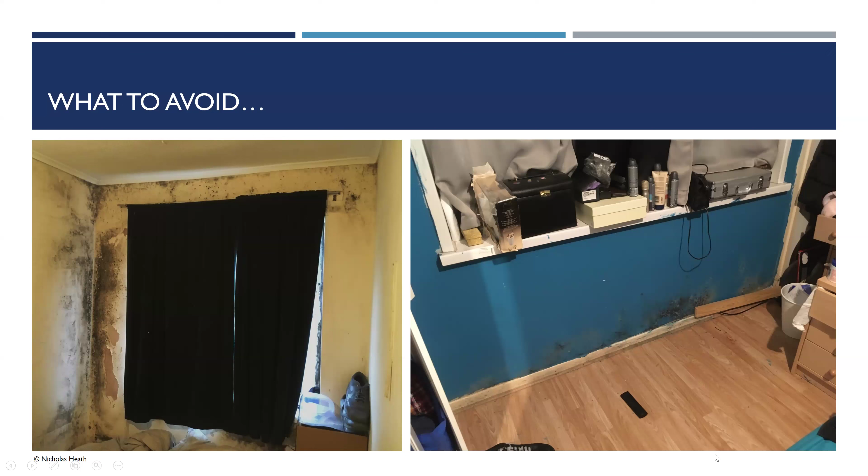This sort of thing we're also trying to avoid. This wall you're looking at here has not been retrofitted, but it's going to be. These sort of embedded timbers are one of the key risk areas. That's the sort of thing that can happen behind your insulation if you don't do it properly.

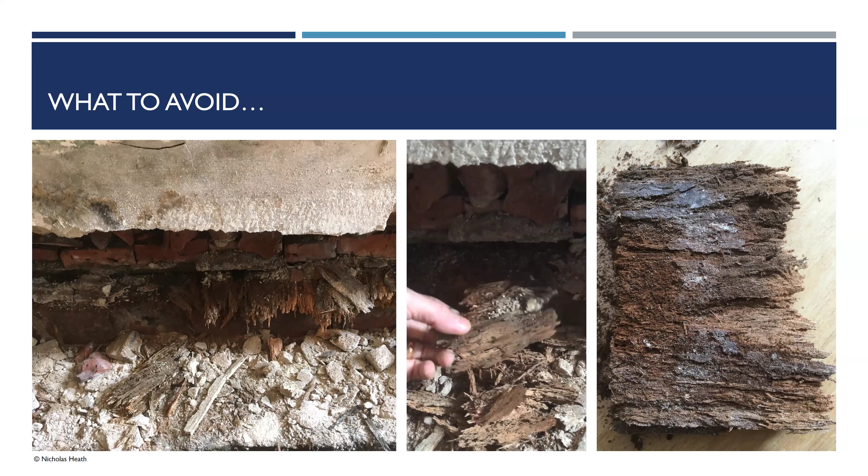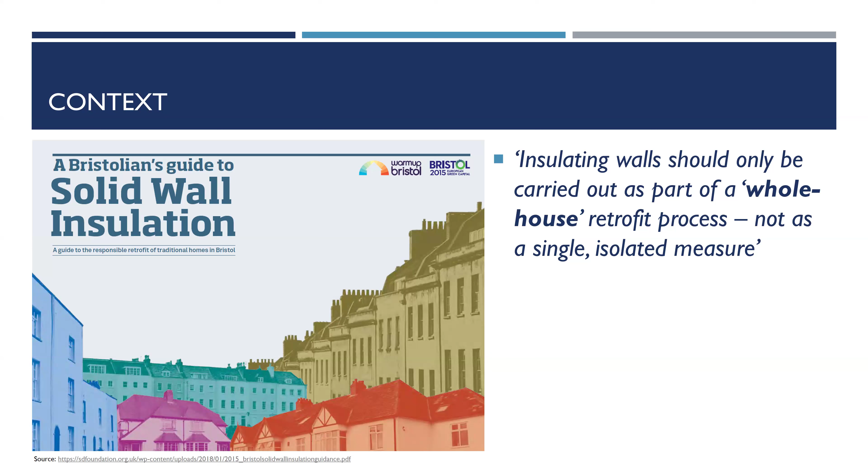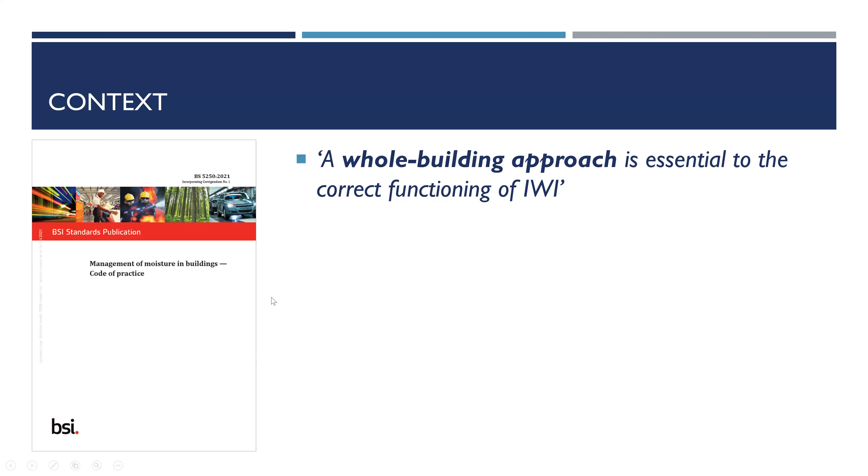This is very important as well. Solid wall insulation, internal in particular, is not a just-do-that measure. It's part of a whole house process. This is a buzzword, a buzz phrase you'll have heard a lot in recent years. It's also quoted in this British Standard document, which is really significant. If you work in this area, you should have a copy of it, I would definitely say.

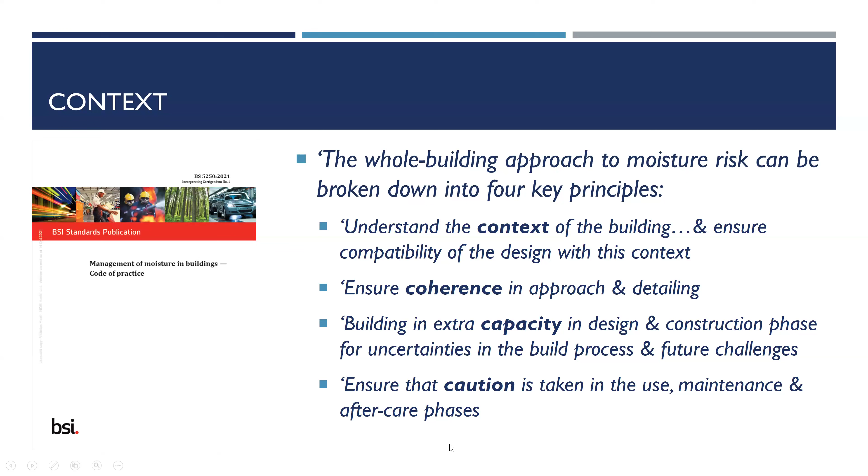And there are 4 really useful principles they use to describe the whole building approach. So if you remember these words about understanding context, ensuring coherence in detailing, building some capacity and caution, then again you're halfway there. There are an awful lot of contextual elements to think about.

I don't need to talk through all these, but you need to understand what else needs doing to the building, where are the defects, what's your air tightness and ventilation, heating strategies, are there any heritage concerns, any targets you're trying to meet, what sort of modelling are you doing and how good is it? How robust is building control guidance, and what's your building control officer like? How understanding are they of the need to address traditional building fabric properly?

Have you got a decent survey? Are you addressing all the technical details? Are you using the right materials? Are you addressing moisture properly?

This is where nearly all the technical risk is, and it's where a lot of my work sits at the moment. Overheating is a particular risk with internal insulation, depending on how it's done, and particularly the way the climate's going.

What else needs doing to enable the internal insulation? What are your occupancy levels like? Where's the budget? How are you going to make sure that the building, as retrofitted, is good not just today and tomorrow, but in 50 years' time? We're going to get more pressure on buildings for all sorts of reasons, so it's a long-term view.

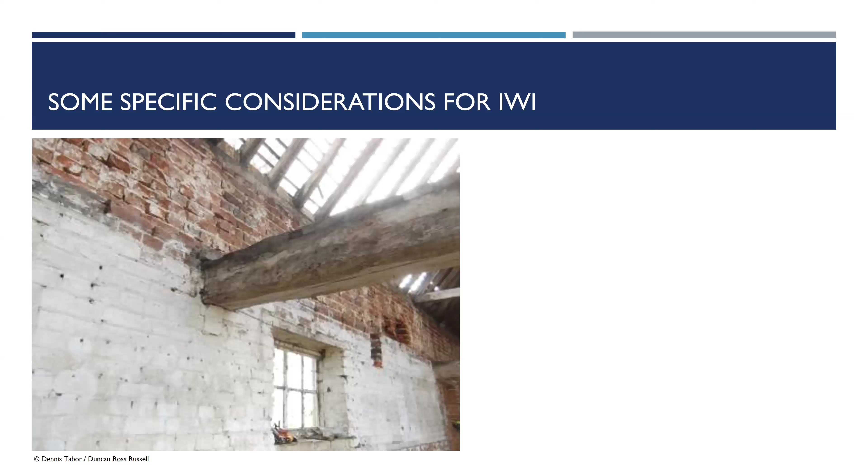Specifically for internal insulation, there are a small number of particular areas of concern that can affect risk profiles. We're talking about building condition, both now and in the future when the building's retrofitted. We're talking about how you're going to manage internal water vapor and external rainwater. Is the masonry exposed, or is it rendered? Is it lime render or cement render? Is the render knackered? Have you got holes in your pointing?

You're going to make your walls colder, potentially making it harder for them to dry out, so how are you going to manage that? What are you doing about embedded timber and metal elements? Can you address thermal bridges? What's your air tightness strategy? And are you mitigating against overheating risks?

Risks are very project specific. They really depend on where you are, what direction you're facing, what materials you're using, whether the building's in good nick, what type of insulation and how much you're using, how well it's designed and installed, and so on and so on.

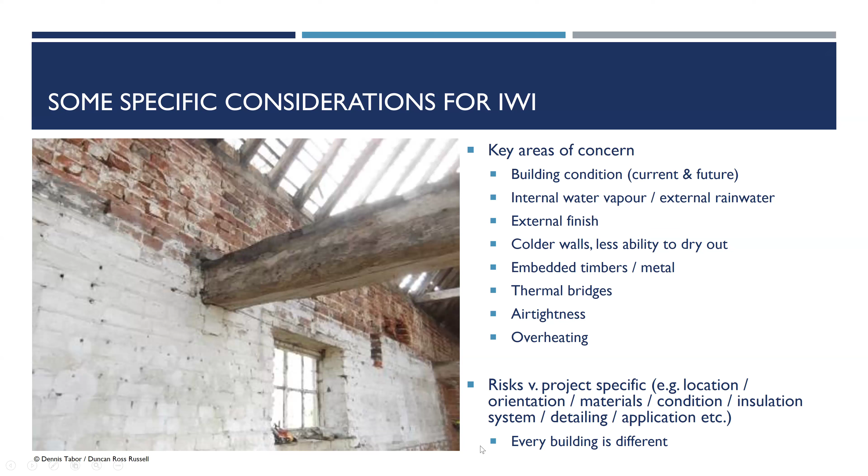Every building is different, so what you've done on one building might not work on a neighbouring building. This is a project I worked on a while ago, which has 5 different wall types. It's a Grade 2 listed building near Cambridge. It's not been retrofitted, but I wrote a retrofit strategy and did some moisture modelling for them, and they need at least 3 or 4 different internal insulation strategies because of the different wall types.

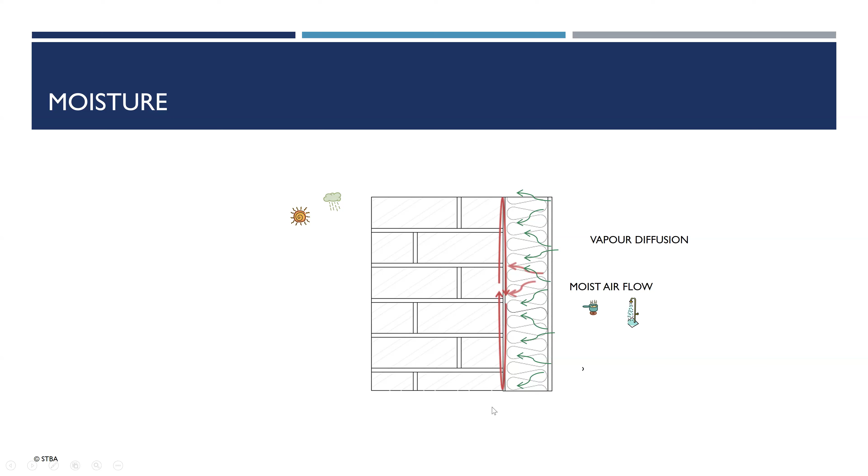You can have liquid water entering the wall by capillary action from the ground and from the walls. You can have gravity and liquid diffusion through open joints, and then there's this not very user-friendly term, solar-driven vapor diffusion, or sometimes called reverse condensation, describing a phenomenon in typical spring weather where you get driving rain on a masonry wall and then the sun comes out. Some of that absorbed water will evaporate to the outside, but depending on context, some can be driven further into the wall, and on occasion it can go all the way through to the insulation. If you have an impermeable insulation layer on the inside, that water has nowhere to go, and that's potentially bad news. So you need a moisture risk assessment that looks at all of this.

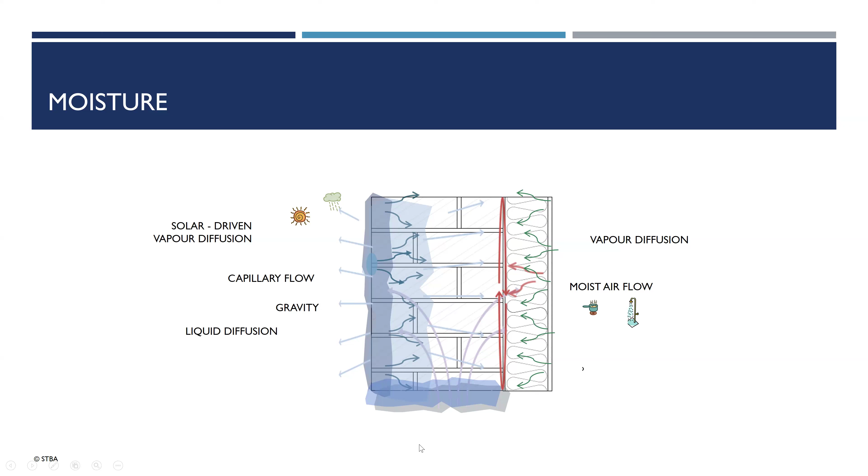Until quite recently, we've tended to use a very simplified moisture risk assessment that only looks at internal vapor and ignores all of this, and it's not appropriate for masonry walls in any way, which is why some of you will have heard of things like WUFI, which provide a much more detailed assessment. I'll show you an example in a few minutes.

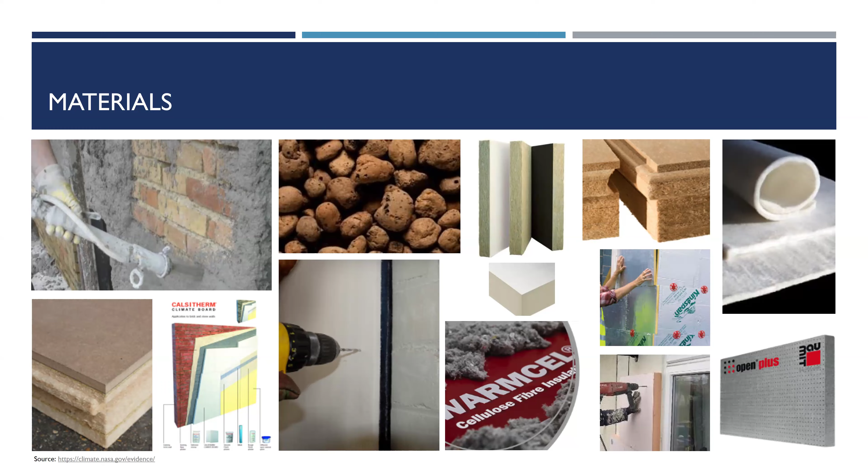That also explains the move towards more natural, generally but not always, moisture-open materials that can allow moisture to diffuse through them in various ways. A lot of rigid systems and a lot of wet systems are emerging and becoming more popular.

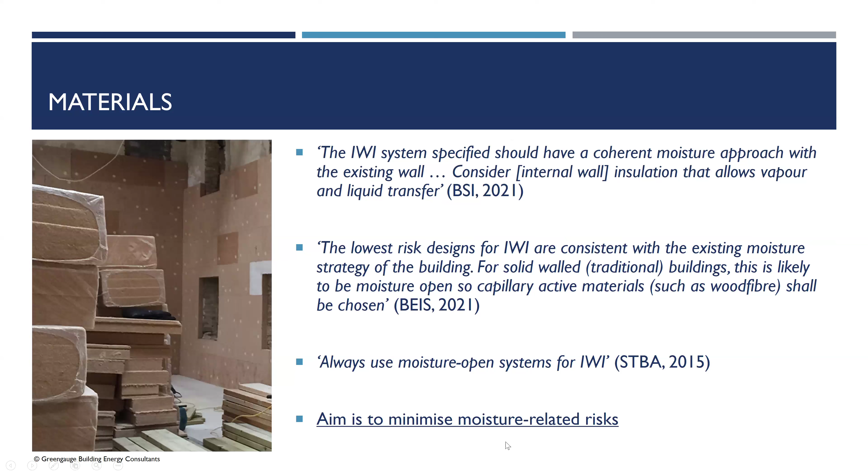These are various quotes from good practice guidance. They're just different ways of saying that if you've got a traditional masonry wall, you should be using moisture-open insulation, and all good practice guidance for traditional buildings will advocate this. What you're trying to do is minimize your technical risk.

So a lot of systems will use board-based materials like wood fiber here, which is probably the most commonly used. But there's much more interest and use of things like insulating lime plaster. That's a building in the North York Moors, and this is a barn conversion in the Dales, both of which I've worked on.

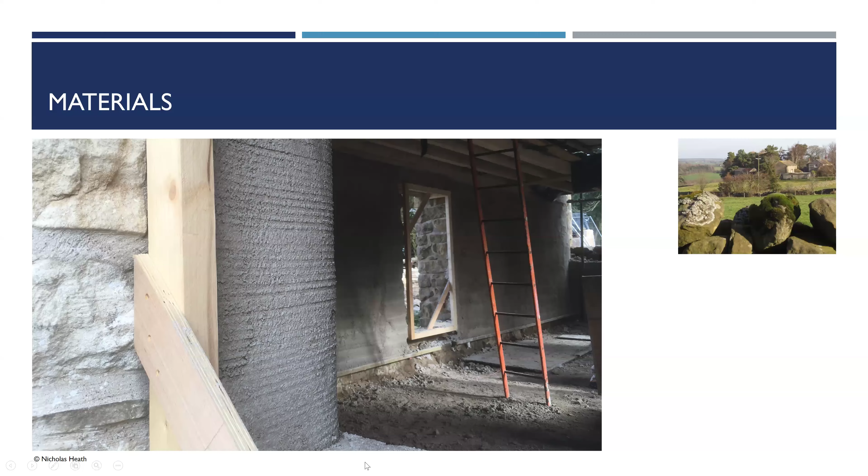This is really good in a lot of ways, but it's not a silver bullet. There is no silver bullet for internal insulation, but I see it being used a lot more for various reasons which I don't have time to go into now. As a baseline, it's important to understand that you're not just thinking about thermal performance with materials. They have an awful lot of roles to fulfill, not least technical risk management and looking after the building fabric and the occupants inside.

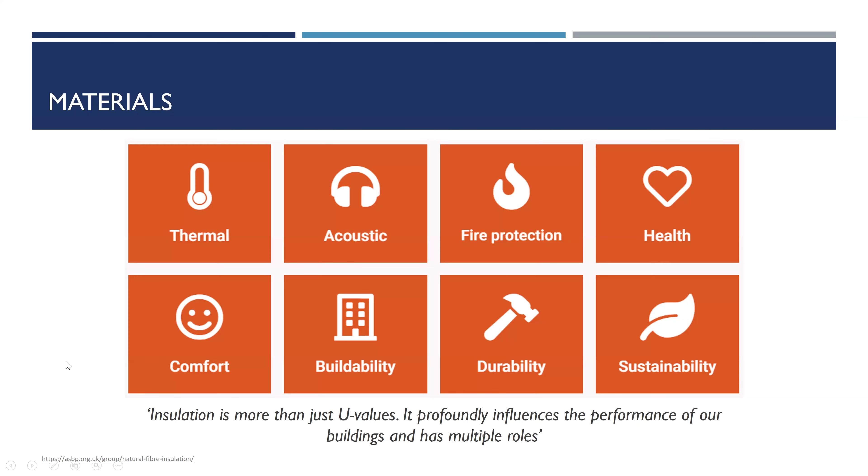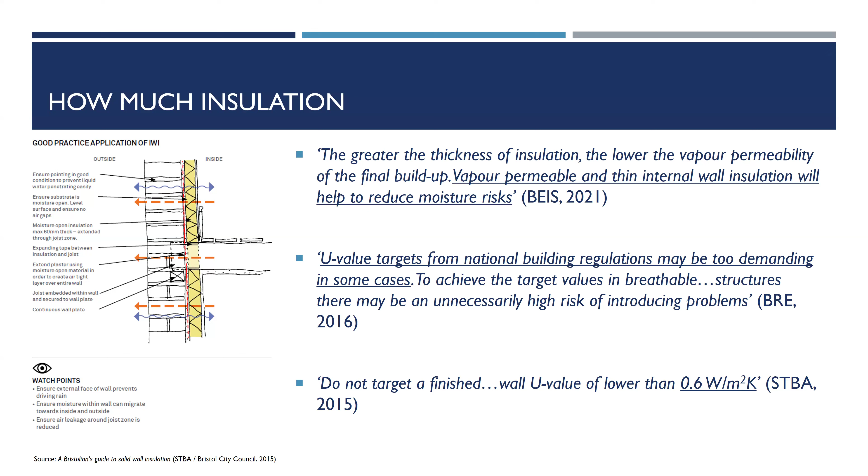When you've thought about materials, you need to think about how much to put on. Again, there are lots of quotes here generally suggesting there's more research and guidance highlighting the fact that doing a bit, but doing it properly and paying attention to the details, is probably going to be more effective and lower technical risk than trying to get the lowest possible U value.

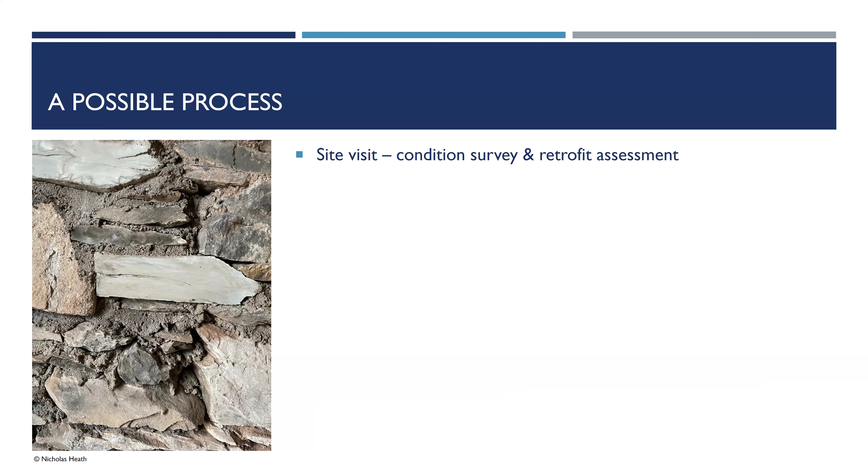So what else? There's loads more I could talk through, but I don't have time, so I wrote a very, very quick possible process. This is the sort of approach that I tend to take on the projects I work on. You look at the building, get a good understanding of it and of its condition. You come up with an initial retrofit strategy, maybe informed by a bit of energy modelling. You have some shortlisted wall insulation options, generally looking at external insulation in the first instance because there's lower technical risk. You can't often do it, so you then look at internal insulation.

Carry out a decent moisture risk assessment, especially in more exposed areas. I've done a lot of risk assessments in exposed and benign areas and found risks vary depending on much more than just where you are in the country. That should lead you towards a more appropriate insulation strategy.

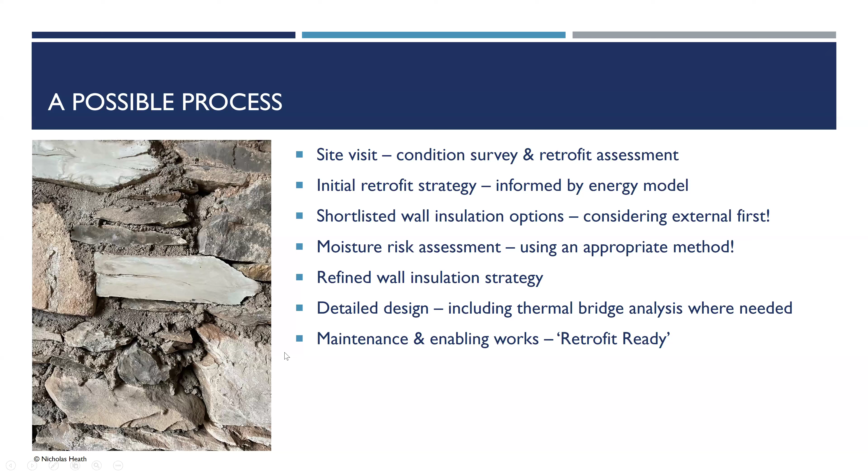You then carry out some detailed design. Make sure you sort out all the defects and get the building retrofit ready - that's a really good phrase to remember. As with understanding, if your building is dry and sound and free from defects, anything you do to it is going to be lower technical risk. A lot of problems tend to crop up when people just bang in the insulation and cross their fingers and hope for the best, without sorting out the underlying fabric.

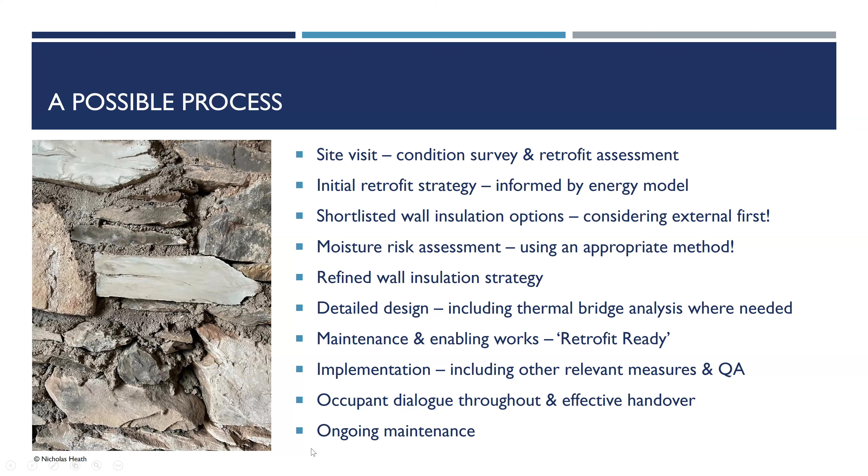When it's done, make sure that other relevant measures, particularly things like ventilation, are carried out, and there's decent oversight. Make sure ideally the occupants are engaged so they know what's going on, why it's being done the way it is, and what they need to do to look after it in the future, a lot of which will be effective maintenance.

So I'm just going to jump out of that presentation and into another one to give you a quick case study. I think this should be about 5 minutes, and then I'll maybe spend a couple more minutes at the end. This is a moisture risk assessment I did recently on a building in southwest Scotland.

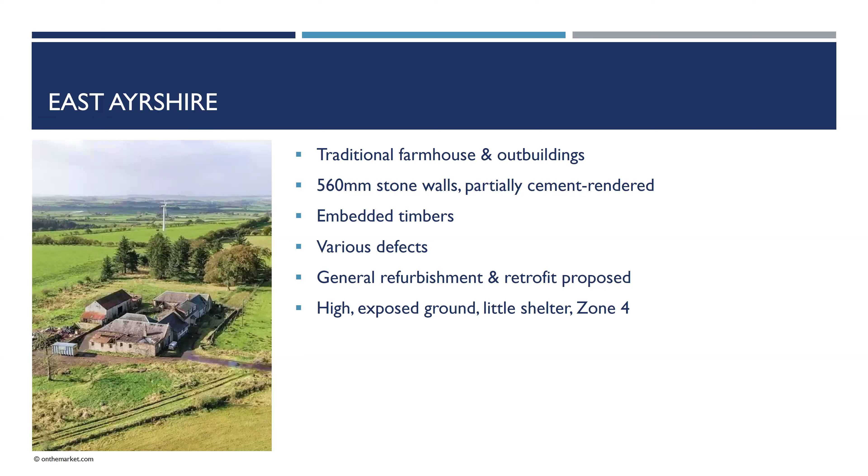So I was asked to look at two main assemblies using WUFI, this tool, which will mean something to some of you and nothing to others. We can talk about it in the discussion afterwards if anyone's inclined.

This is what the architect suggested: a thick layer of impermeable foil-faced foam board with a bit of plasterboard. And the client is more interested in an approach that's more in line with traditional building guidance - a bit of lime plaster, a bit of wood fibre, and a bit more lime plaster.

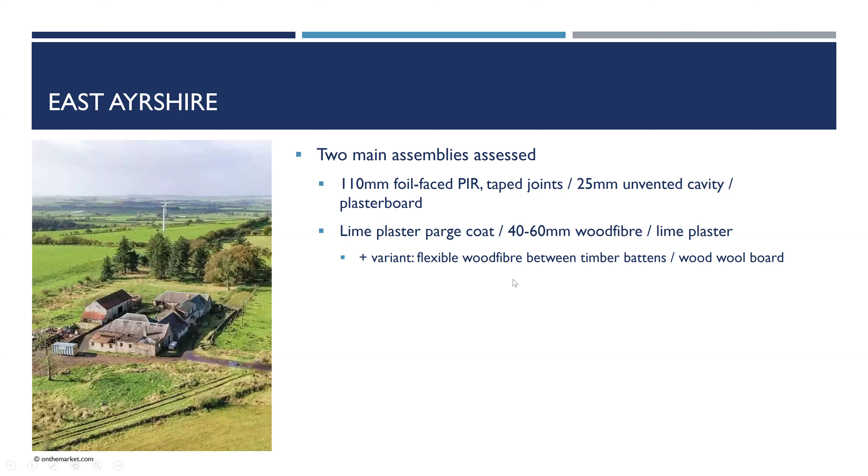He also asked us to look at two different types of wood fibre: rigid wood fibre finished in lime plaster, and flexible wood fibre between timber battens finished with wood wool board. He's proposing taking the render off, and maybe finishing it in lime wash, or maybe just leaving it as exposed stone.

We had some material testing carried out to inform the assessments, which is really important. In this case, we got the client to take some samples and send them to the third-party consultancy we use for that service, which is Green Gauge.

Of whom Paul is on the line, I think - hi Paul. The kind of things that jump out to me before I even start the assessments in terms of possible risk factors are general things like the level of exposure, the fact the masonry is not going to be covered by lime render or even cement render, the fact there are a lot of defects, and the fact there's an unknown heating and ventilation strategy.

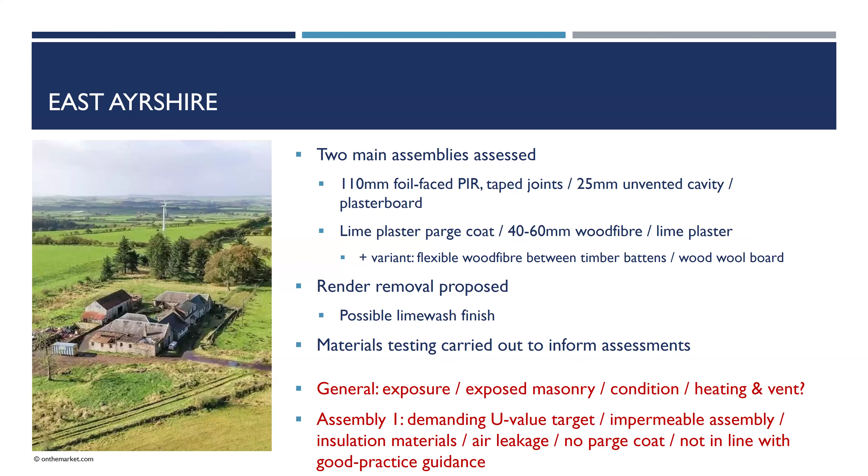And for the first assembly, the foil-faced PIR, there's a very demanding U-value target. It is impermeable - the insulation materials can't handle water apart from blocking it off. There's potential for air leakage, there's no parge coat, and it's not in line with good practice guidance. So I wouldn't expect that to show good risk profiles.

These are your predicted thermal performance parameters - this is your U value. The lower the U value, the better the thermal performance, just in case anyone's not aware. So it looks pretty poor with no insulation on, although in reality, if you look at in situ monitoring of solid stone walls, the baseline U value is probably half that - probably 1.2, 1.3, maybe 1.4.

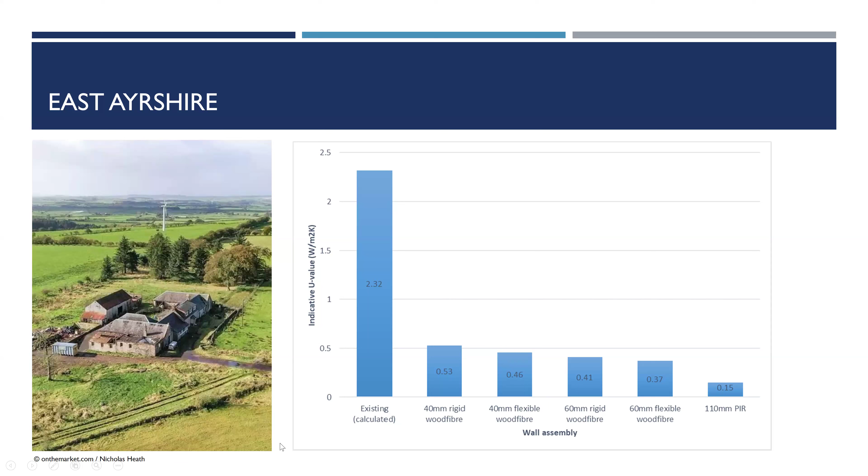These values here are more in line with good practice guidance, suggesting just easing off a bit. If you put more insulation on the walls, the U value gets better. And over here with the PIR, you've got a very low U value, which is known to increase technical risk, especially if you don't do it properly.

So, key findings - there are a load of graphs which I'm not going to show you because they're not very user-friendly, but I'll go through them afterwards. Assembly 1 shows very high risk profiles even under good conditions - high moisture content in the masonry and insulation, which gets higher over time, well above indicative risk thresholds for timber rot and mould, and limited drying ability over time at the back of the insulation. The assembly with 60mm wood fibre shows much lower risks, but still not risk-free.

If you use rigid wood fibre, you have far lower water content in the insulation material than if you use flexible wood fibre. And if you use a bit less insulation, that shows you the lowest risk profiles, but still not bomb-proof. Well, not that any insulation on the inside of a solid wall is bomb-proof.

If you cover the walls in lime render, an appropriate lime render mix, that shows the best option. So 40mm wood fibre with an external lime render, according to the pretty detailed moisture risk assessment, that's your best option for that building.

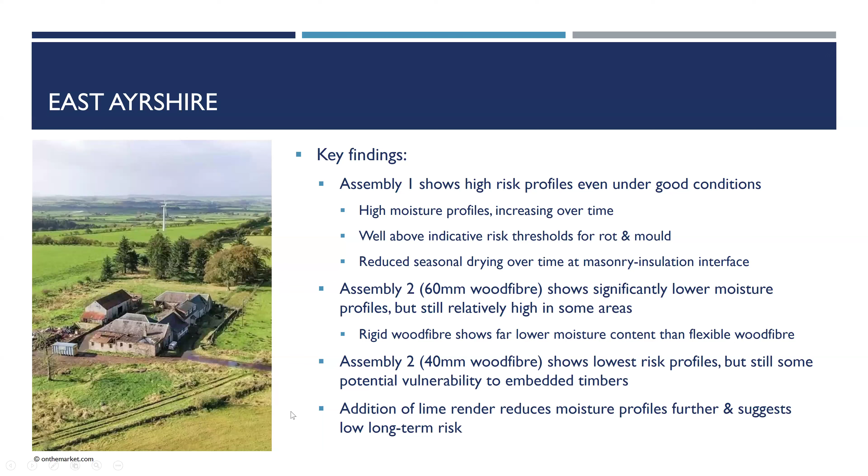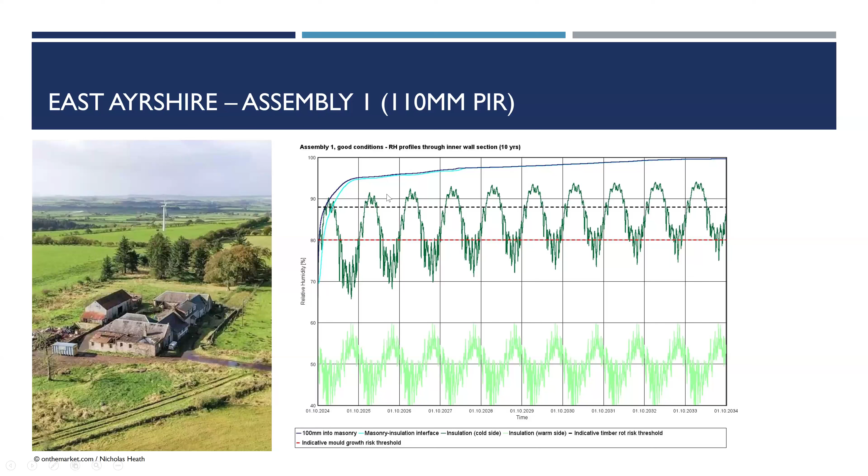I don't have time to go through these, but if you've got lines going upwards, these are moisture profiles at different points in the assembly. Moisture content going up over time, this is 10 years in this case, is generally a bad thing. And you can see as you go through better assemblies, those moisture profiles drop. This is your indicative timber rot risk threshold, this dotted line.

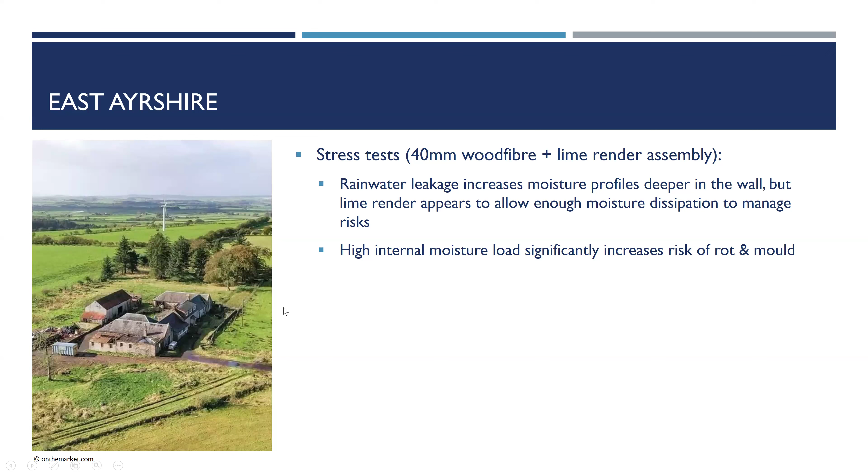So 40mm wood fibre and lime render looks pretty good under good conditions. You can also carry out stress tests to see what happens if you get rainwater leakage behind render, or if you've got a defective or inadequate ventilation system. And again, those sort of things often flag up risks. So it's a good sense check of how your wall's likely to cope with typical defects.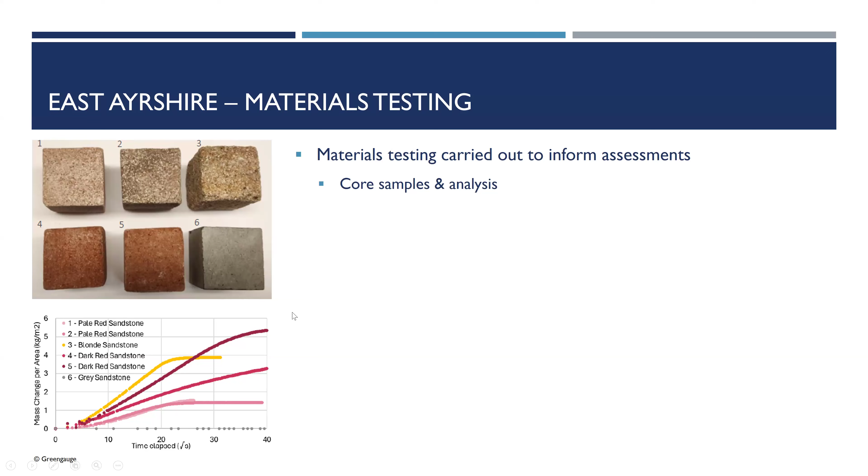What else is worth saying? There's the materials testing, these samples which were sent off to Green Gauge. Only other thing I wanted to touch on is that there is a BBA certificate for the PIR system, and it's worth just having a quick look at that before I stop talking.

If you look at the section that deals with condensation risk, this is 6 years old. It refers to BS 5250, that British standards document on moisture management that I showed you at the beginning and said you should have a copy of. That is a version which is well out of date and has some incorrect things in it.

It refers you to BRE Report 262, which has been withdrawn this year, and the section on internal wall insulation is not in line in any way with good practice guidance for traditional buildings. This is just highlighting the very high vapor resistivity that the foil back PIR will have.

This section is saying if you use this outdated version of BS 5250 to do a risk assessment and it flags up a risk, you should do a WUFI assessment. Whereas now the guidance will say you should do a WUFI assessment anyway.

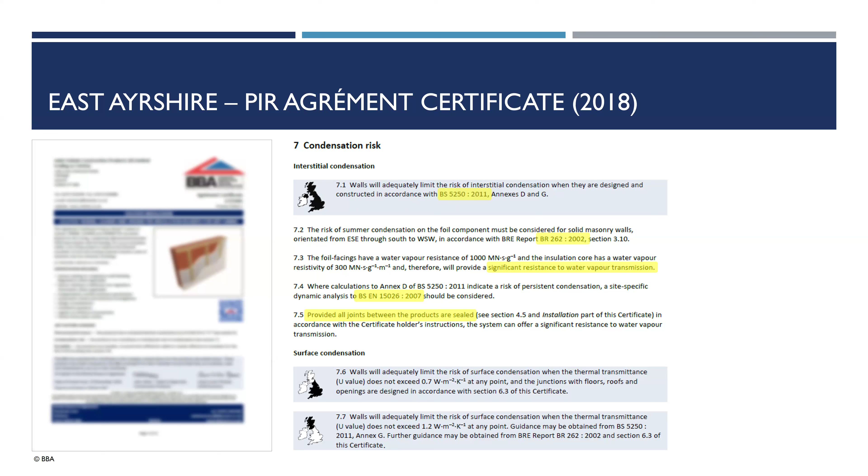And this is highlighting that you're going to have a good air tightness layer with that very, very big caveat of all joints being sealed, both now and in the future. So having a certificate doesn't necessarily mean it's bomb-proof.

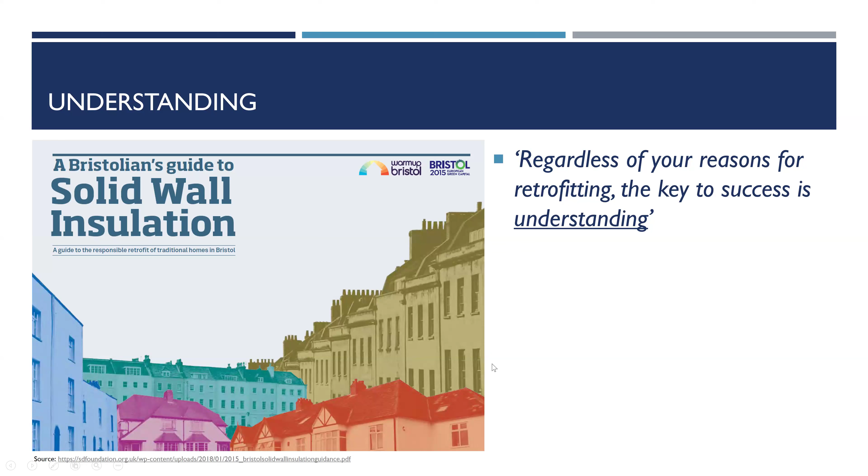I'm just going to jump back in for another minute or so to the other presentation and just finish up. I come back to this most important quote: do you understand what you're doing? If you do, crack on, and if you don't, just stop and think or do some reading.

One minute left. One minute left, fine, thank you.

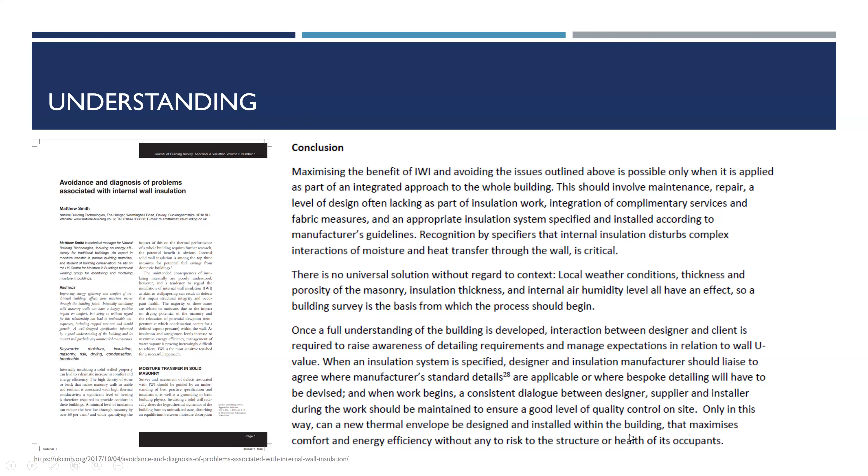I'm not going to go through this quote, but I would really recommend you read it. This is from, probably 7 or 8 years old now, but it's a really good potted summary of technical risks around internal insulation. And every word, I know there's a lot of words there, but every word in there is bang on. It's a really good one to read in terms of understanding.

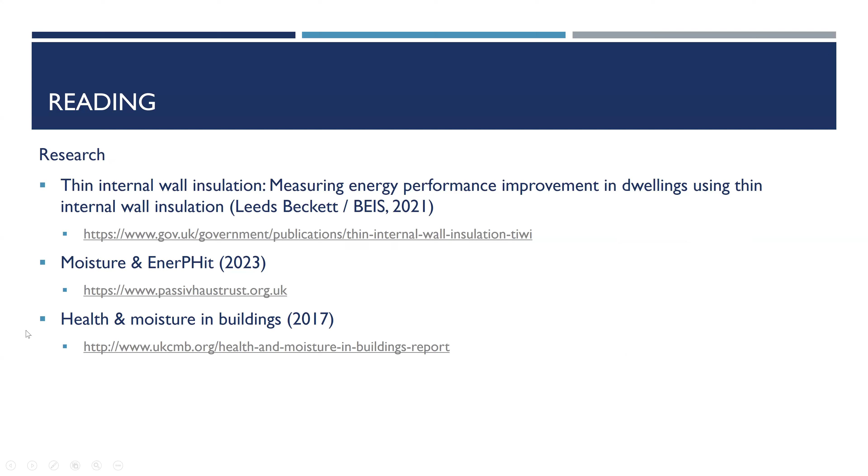And that is quite enough from me. So I'm just going to stop sharing. And I hope that was vaguely intelligible.

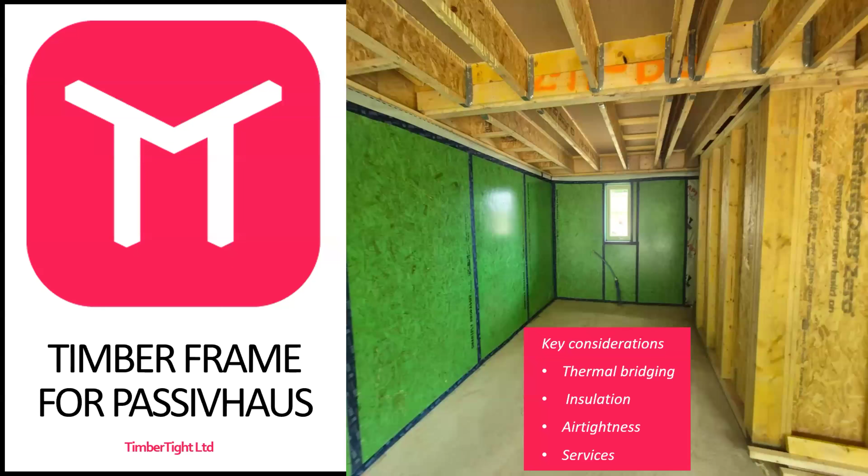So it's all new build timber frame. I think I may also turn my video off as well, if you don't mind. So Andy, if you can keep your video on, that would be helpful, just because I can't spotlight anyone otherwise. Sure, oh, seems to be allowing it. That's fine, carry on.

So for us in timber frame, we've been doing timber frame for a lot of years, and our company was set up around 7 years ago, and we mainly did open panel timber frame structures, and the installation and everything was put in on site by others. But over the last few years, we've developed knowledge and know-how to produce U values, psi values. We've got our own ability to create thermal bridging calculations.

And 3 years ago, we were approached by one of our main clients to provide a Passivhaus timber frame system for a project in Mill Lane, Halton, I think it's for Lancashire or South Lakes Housing Association. And we started thinking about what systems were suitable. I'm sure most of you will have seen there's I-joist wall systems, which are actually floor joists turned up, and Larsen truss, which are separated frames by battens. And for our manufacturing systems, they're all too complicated.

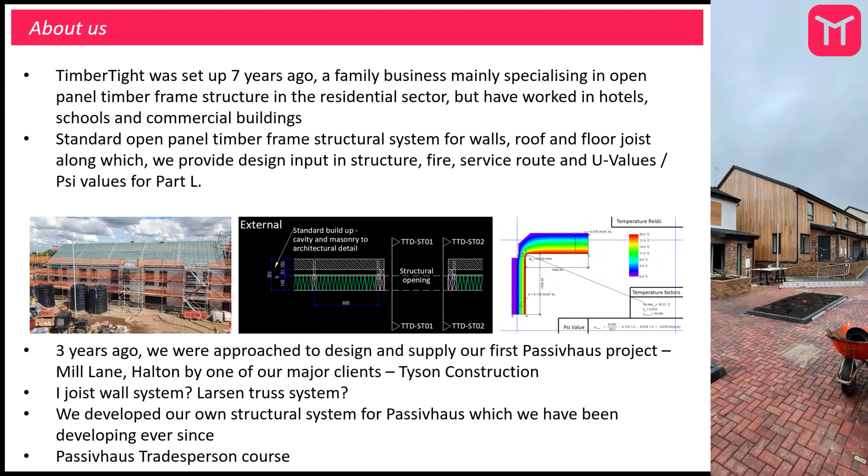So we've developed our own system, which is based on our standard timber frame, but a twin wall with offset timbers to reduce or eliminate thermal bridging. We do this around structural openings, so we've got good thermal bridging adjoining to window details. The standard frame without anything else can achieve around 0.14 as a U value, but then we can add to this wall build-up where required for Passivhaus requirements for each project, and we can get down to possibly 0.1 depending on the complexity of the building and the form factors.

The main considerations for us are the airtightness, the services that are going through the structure, and for our system, we wanted something that was, as previously mentioned, vapor permeable. So we've got a thermocell board on the outside, which replaces what's commonly used in timber frame, which is like an oriented strand board. And we're also insulating these frames with a non-combustible mineral wool.

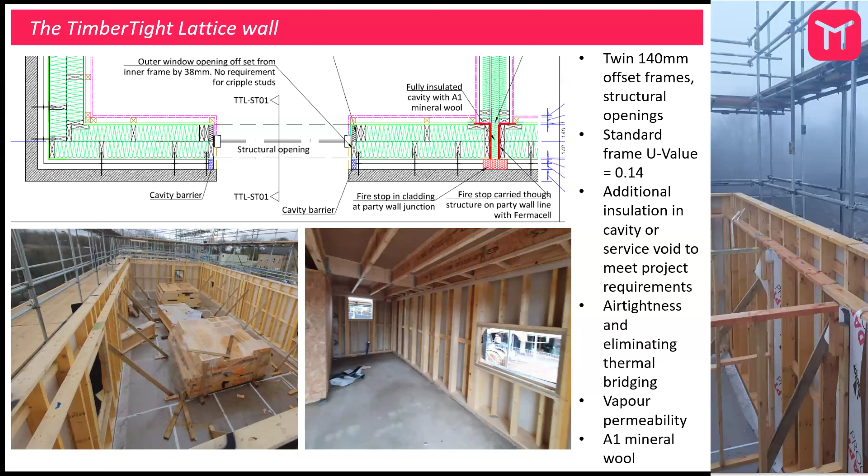This is the system that was used in the Drighlington project, which I'm sure a few of you may be aware of. And we're still in development with this project, and we've learned an awful lot on that job. But we're finished on that site now, and the site continues. I think they've got an open day or two coming up soon.

So in terms of air tightness, flat surfaces internally are straightforward, easy.

During construction, we're putting membrane stripping that can then be joined at a later date. The reason for the gap is that we want to tape those membranes when the building's got the roof on and the windows on and it's dry.

We've settled on two products really that we'd like to use all the time for air tightness, and that's an air tightness OSB board, SmartPly Propassiv, and a Tescon Vana tape. There's plenty of other products out there, but those are the ones that we found are the best for our purposes, at least for off-site construction.

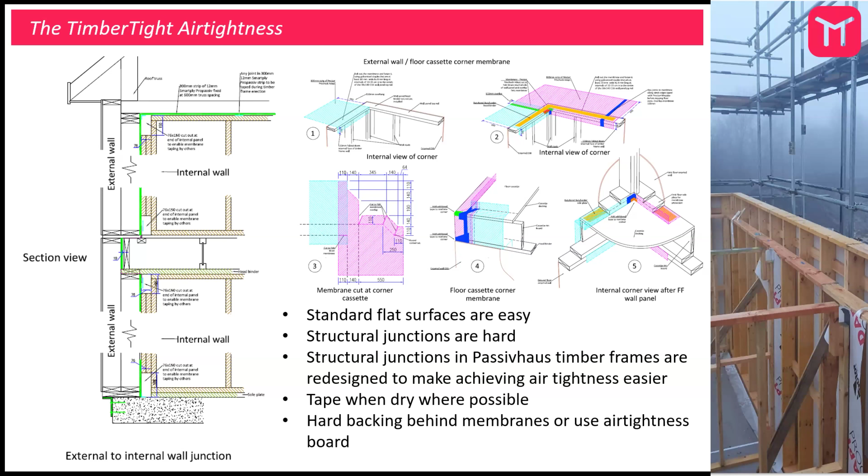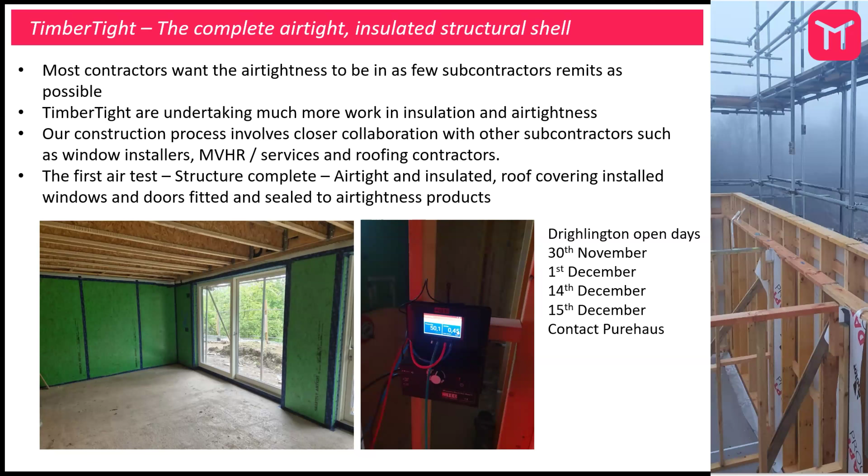So this is again from the Drighlington site, and it shows where we finish, which is the first air test before any of the services go in. We test the building, we work with the window suppliers who install the windows, then we tape the windows, and we find that that's what contractors are requiring now - that we provide the full airtight structural shell that's fully insulated.

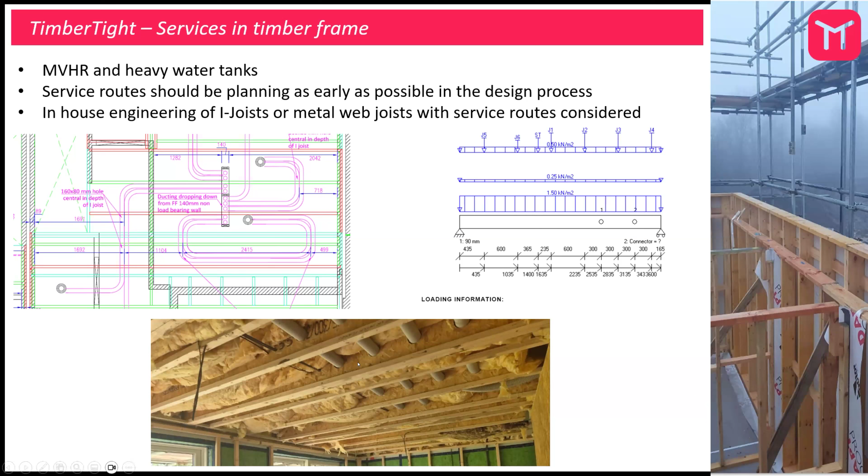Another key consideration: we get the M&E layouts and the service layouts, and we design and engineer joists so that pipes and MVHR ducts can pass through.

We do a lot of other systems as well for Passivhaus, where we haven't got as much space for external walls. This is an ongoing project at Parkmount Road in Manchester, and we just started on site with this system.

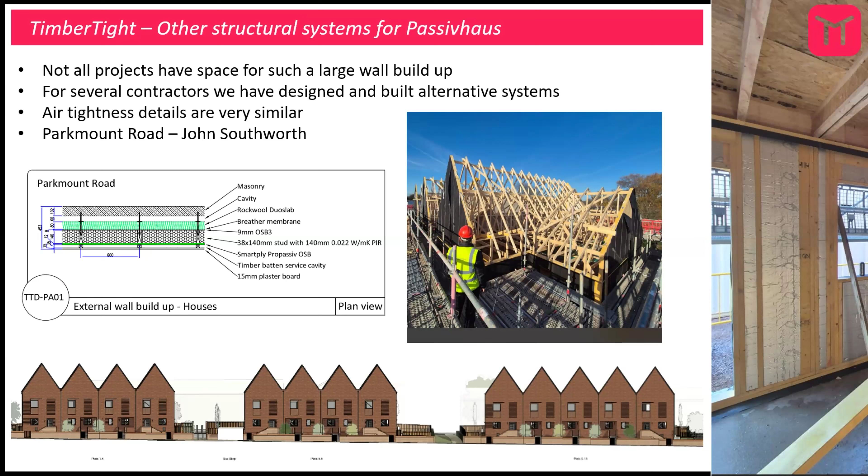I think I could probably spend another hour talking about all that, but that's as much as I can manage in 5 minutes. So thank you.

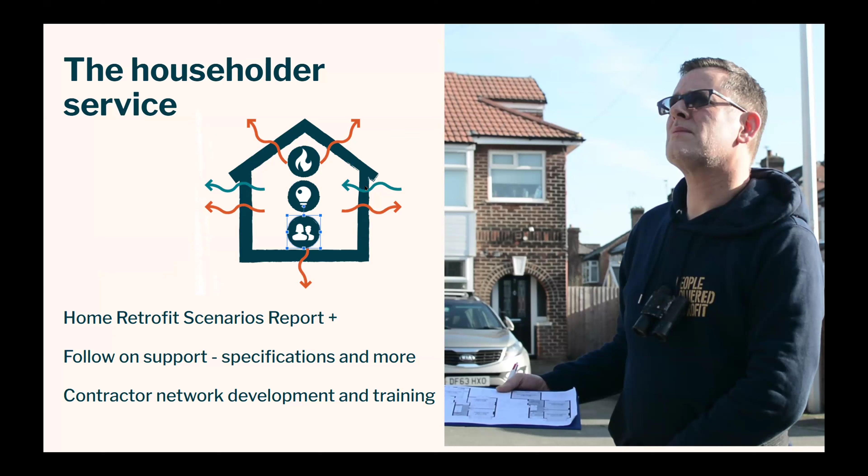And... finally... I think that's about it.

They all know about high levels of insulation, windows and air tightness, but the actual doing of it is very different, even down to silly things on site like the air tightness tape - you can see some of our joints there. For the electrical grommets, try explaining to an electrician who's 55 years old and has been doing electrics for 40 years that he now can't drill through a wall and through the insulation to put cables in.

And by the way, you've got to put them in rubber grommets, and when you put the rubber grommets on, you've got to drill every cable out individually. So yeah, I'll say it didn't go well with the first electrician - it didn't last too long. However, we've now settled on a team that really embraced it.

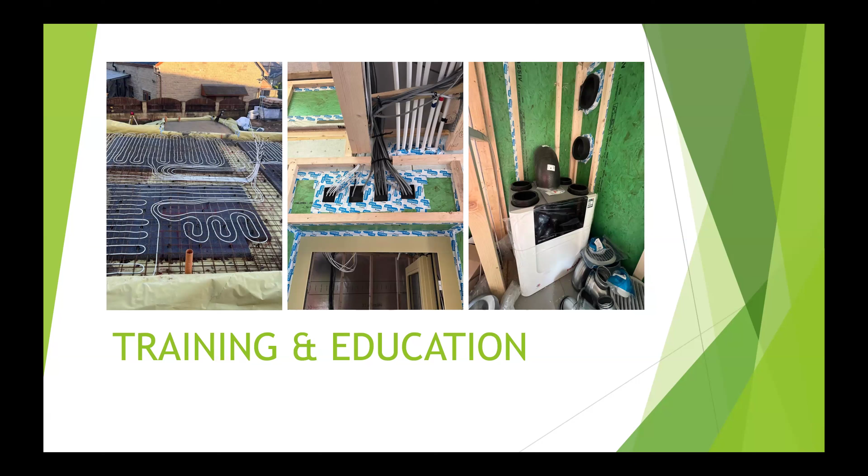The new things that we're training people up on, they've really embraced it. And the air tightness - we've had a lot of help from Partel, doing lots of courses for us and things like that, down to the detailings that you can see there on the windows.

We had an issue with this - our subcontractor who built the timber frame, when that window frame there is plastered up, you can still see the tape. Now, I don't know how much use you've had of air tightness tape, but it does not come off easy. So we had two days scraping that tape off. This is all about having the skills and the knowledge to know that - we've lost so much time on this job because of silly things like that.

And on the window details you can see there, we had a very senior foreman that we've parted ways with now - a very good joiner foreman on all our traditional builds. But as you can see, we actually had Phil Bixby on the call today, come with his infrared camera to do a little bit of snagging with us. We found that he hasn't put the insulation on the outside of the windows. It's not the end of the world because we can take the cladding off and do it that way, but all these things that we've learned have come from this one job.

Also, what the operatives have been telling me on site - they've absolutely loved doing the professional development side of it. It's things I've never done before. Everyone's embracing it. They like the fact that there's better quality control in things like this. They like the fact that they're involved with innovative projects, to be fair.

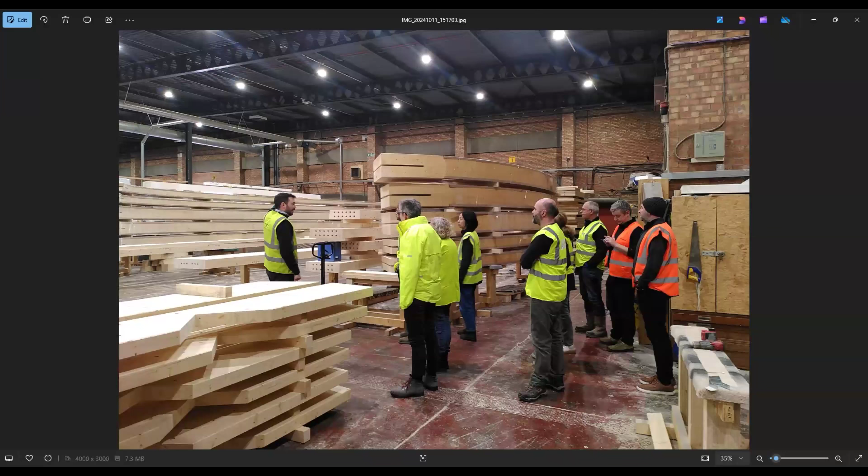We get to go to some really interesting projects, and we're very grateful that our members often open their projects up. We've been to some really great Passivhaus projects in the last couple of years, including the one that Michael's doing in Bradford. We've been to some interesting ones down in Huddersfield. We've been to an amazing retrofit of a farmhouse that Niche Design Architects did.

I think Chris might be on the call. And then the most recent one, last month, we went to visit this engineered timber factory down in Barnsley, and they very kindly opened their doors up to us. Some of you on the call are in this photo. But that's the cool kind of stuff we get up to.

And in 2025, we've got a site visit lined up to go and see Wrapped Homes' latest project in York. They're doing a whole house retrofit on, it's actually a Victorian council home, but they're doing internal wall insulation and MVHR, doing a very deep retrofit. We're going to go and see the project that Michael's got in Huddersfield, which looks amazing. They've totally gutted this bungalow in a conservation area, doing a whole house retrofit. So we're looking forward to seeing that.

And then I'm also hoping to arrange a visit to the York Heritage Skills Training Centre, which is part of the York Minster. They've just retrofitted a historic building that hosts their Heritage Skills Centre, which is where their stonemasons and the people that do historic conservation work are based.

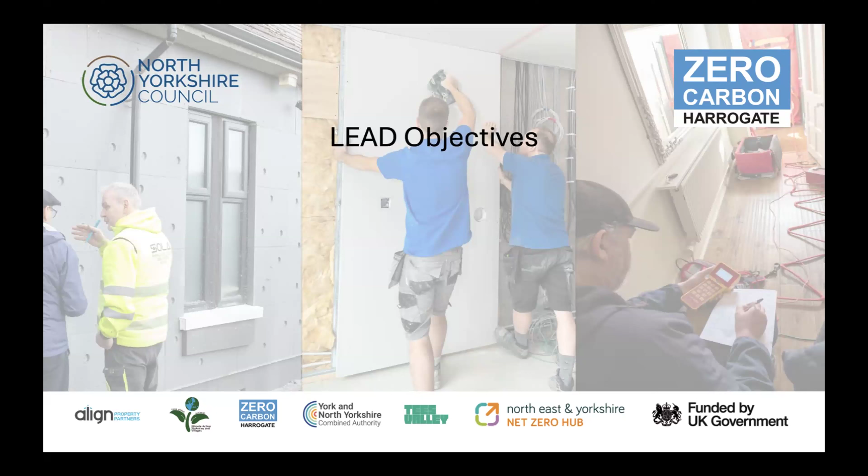So without further ado, the objectives of LEAD are to prove concept of retrofit for a one-stop shop model in North Yorkshire. Both from the council's perspective and from Zero Carbon Harrogate's perspective, we're looking at how that might roll out. This programme is to try and improve that, understand the archetypes, understand the attitudes of homeowners within the county.

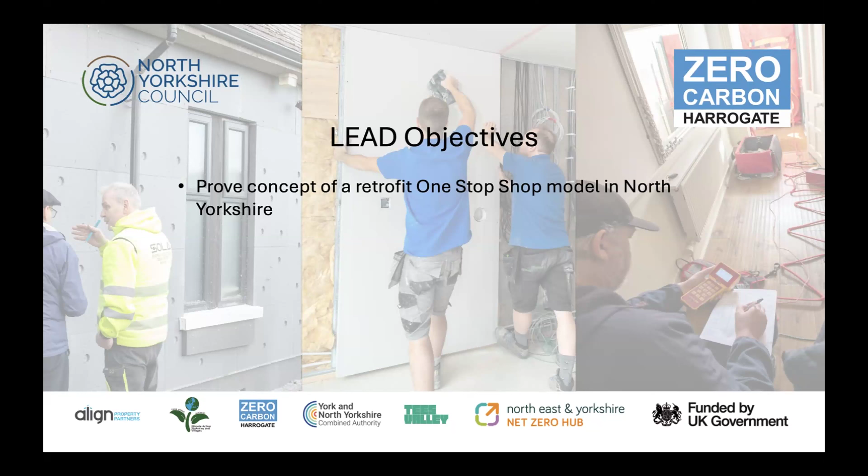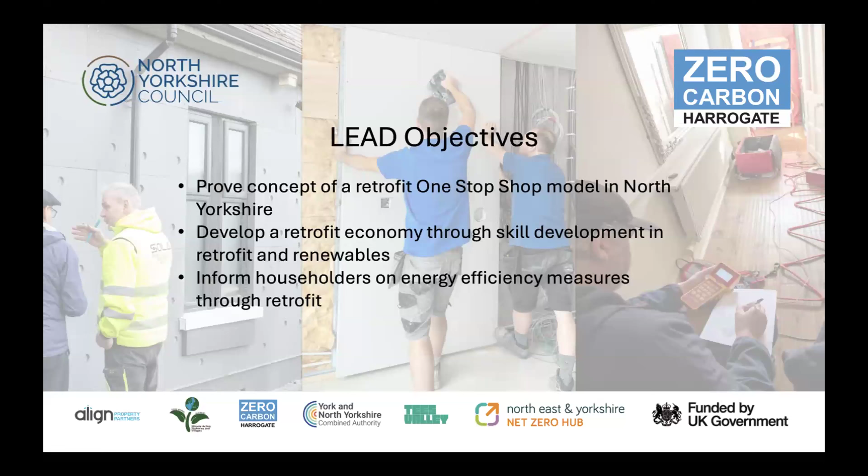A big part of it, and the bit that I'm involved in delivering, is developing a retrofit economy through skill development in retrofit and renewables, and informing householders on energy efficiency measures through retrofit.

So retrofit and renewables training is primarily directed towards the trades, to upskill those already in the market and develop that as quickly as we possibly can, rather than going from grassroots, if you like.

The importance of the courses we're running are, for the most part, nationally accredited, to make sure we get that kind of continuation, and give us as rounded as possible a retrofit economy skill base.

So rather than in our previous programme, where we looked at a limited area of training funding, what we've tried to do is expand that out to give a more rounded retrofit economy. So for argument's sake, if we're looking at training air source heat pump engineers, we're not just training those.

We're also looking for people skilled in F-gas, which is a qualification you need to actually deal with the gases within air source heat pumps. So it's trying to make that a rounded economy rather than just delivering the first part of something.

It goes beyond that, but those are the key ones, and we've got some flexibility around the funding in that particular area, depending on where we see the demand. Something I've been talking about a lot recently is having that flexibility, which funding tends not to be, and we're funded through DESNZ.

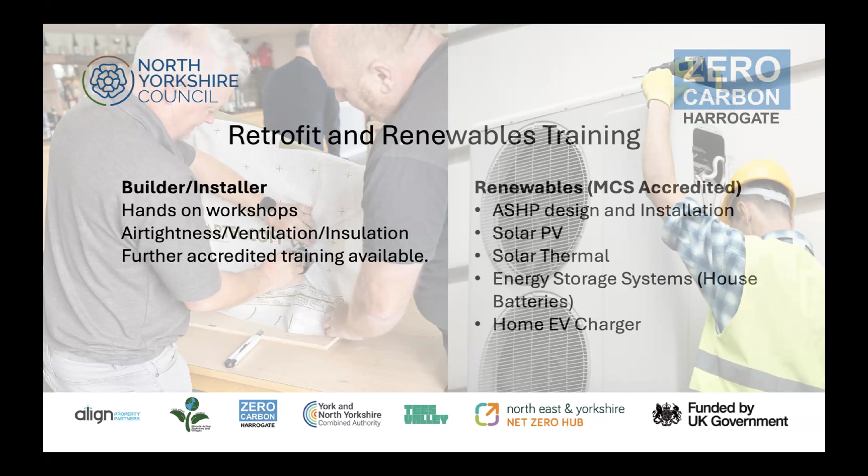The other side of this is what I call retrofit professionals, in the sense that they tend to be roles that are very specific to retrofit.

Again we've learned - originally we had funding for just retrofit assessor, but we found there wasn't that many domestic energy assessors, which is a pre-qualification to become a retrofit assessor, out there. On that basis, we've extended our funding to cover both domestic energy and the retrofit assessor, and then retrofit coordinator, which was in our previous campaign and is in this one.

These are delivered through the Retrofit Academy, and possibly Elmhurst. We have some contractual issues at the moment, but Retrofit Academy have been doing the lion's share of this.

Again, showing kind of flexibility, we don't have a KPI for retrofit designer, but it is an area that has come up recently. We've seen a demand, especially within architects. So, one minute, John.

And as such, we managed to scrape some funding away from something else to be able to fund 10 places for that. So it's showing we're trying to get some flexibility as the market moves on.

Two very quick things. With the help of Diane Hubbard, we did a heat party. I've been talking to Diane for quite some time now, and basically what we're trying to do is demonstrate to householders what's actually going on in their house. You can talk till it's dark about it, but until you actually show them exactly what's happening - and that's what we did with the heat party.

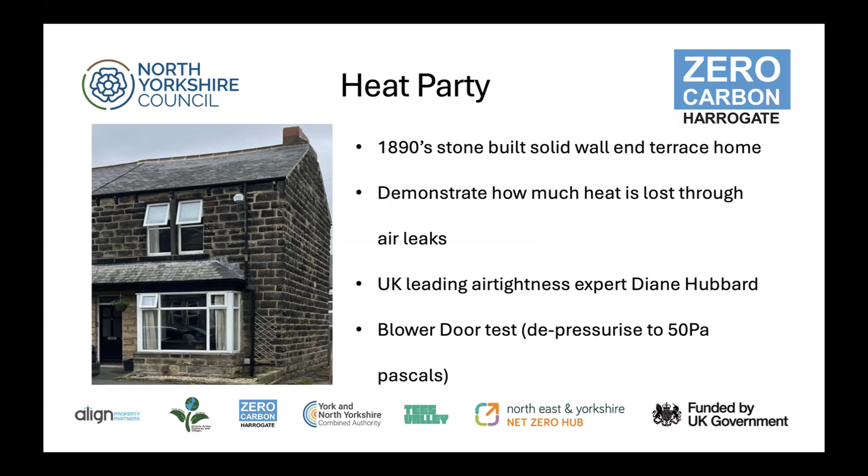We essentially used a blower door. We created negative pressure in this particular house in the photo, and we had residents who live in this kind of house experience what a gale coming through that house felt like, and essentially what the quick fixes are in terms of starting to tackle that, but for them to understand how much heat they're actually losing out of their house.

Thank you very much. If any of you - I know Steve's on the call at the moment - it was just amazing to see the response we got from the public.

They're out there, they want to do something, and it's all about - and this applies from both sides - confidence. It's confidence from the trades, and it's confidence from the householder. And I believe, last Thursday night, it was Baltic outside, but we got those people that came along, they asked questions, and that's what it was all about.

Right, okay. Brilliant. Thank you very much for listening. My details are on if anybody wants to contact me.

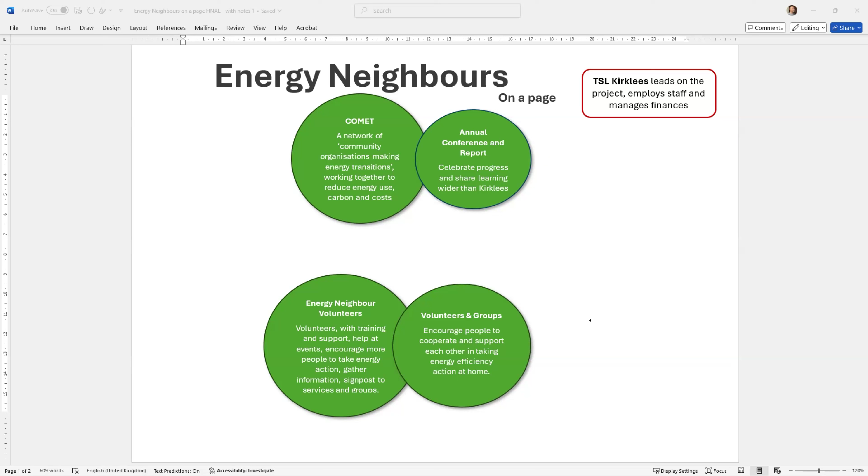There'll be a project team, 7 staff, and we're currently recruiting for a project manager, a data manager and a coordinator—the 3 posts that hold it together. Then in the 4 communities with the highest level of fuel poverty in Kirklees—Batley, Heckmondwike, Dewsbury and Huddersfield—there'll be a community energy development worker to work with those communities.

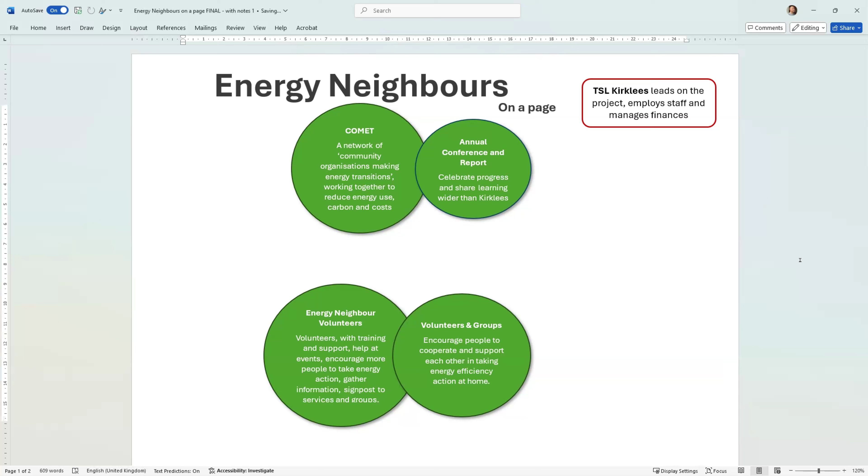We've got a partnership with the Climate Commission who are going to help us keep our focus on climate impact and help share the learning from the project. The idea is that we try and reach people who don't often get involved in this stuff, but who are affected by just the cost of energy.

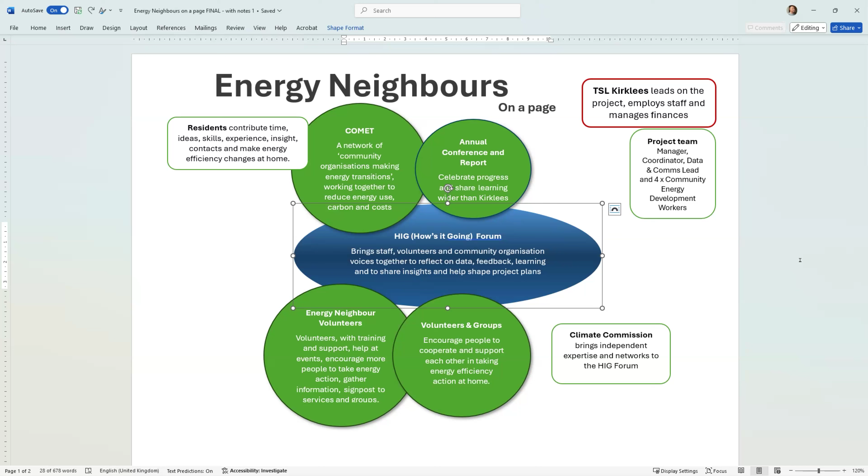Holding it all together is the How's It Going Forum. This project has at its heart the idea that we can make decisions together, not just treating people as consumers, but treating them as active agents and partners in this project. So the quarterly forum will look at how the project is progressing and involve the communities in decisions about how the money's spent and what the workers do.

We're going to start by just listening and connecting with the community organisations and the residents there, and start from wherever they are. If their priority is health and they're worried about mould and all those things in the house, then that's a way in to start talking about energy. Most of them are not saying we really want to do something about climate change—they don't fly all over the world and have big cars and change their gadgets every week.

So we need to evidence impact. There's going to be a whole data part to it and some independent evaluators.

We want to have conversations about the future of energy in these communities, start to think about community energy projects, sustainable community buildings, green businesses, all that side of things. We're looking for learning and training partners and energy experts, so there will be a very small tender going out for energy experts.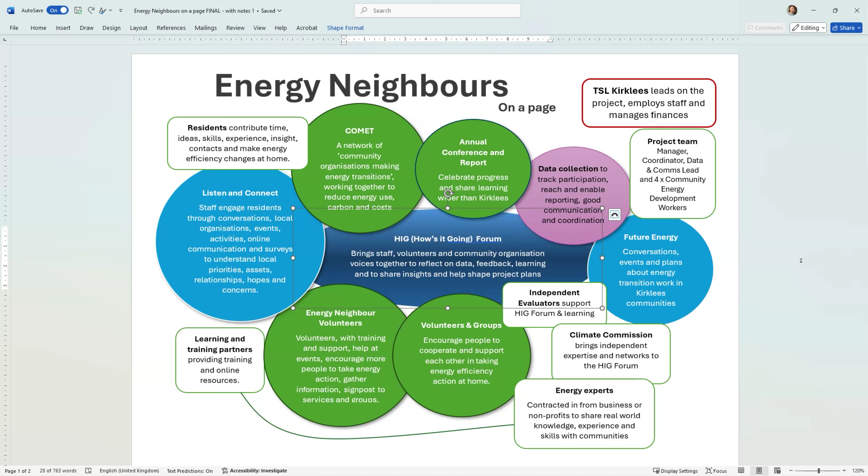And that's my project. It's all very exciting. We'd really welcome links with more technical and practical folk to try and join up across communities and the businesses. So get in touch—I'll post the link in the chat.

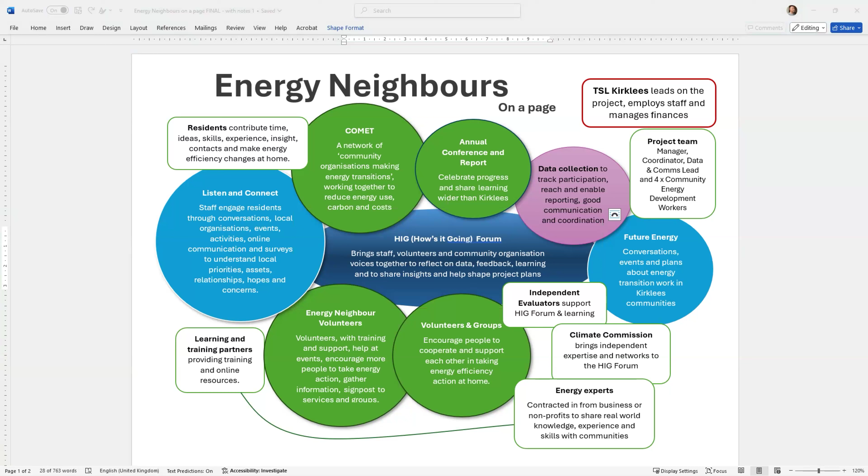Oh, thanks, Tom, that's brilliant. That's actually quite chimed with me because my work is also community based, and I'm trying to do a similar thing through the Climate Action Leeds project in Leeds, working with community centres and community buildings that are struggling. So I will definitely have a conversation.

I think that'll be great to look forward to. I'm just going to take 2 minutes to tell you about a little bit of the work that Climate Action Leeds has been doing before we take questions.

I'm the housing and energy partner for Climate Action Leeds and work for Powered Homes. So my focus is not technical—it's kind of a supporting, connecting, enabling, amplifying kind of role, which I think is similar to Tom.

I've been running, as part of that, retrofit events. We're going to be running some in-person events in the new year, probably in February in Leeds, just to try and keep up these conversations and keep these networks going. So I'm going to be trying to focus on creating bigger networks and getting people together in the same space a bit more often, so look out for that. I will be sending out information about that.

I'm also developing Leeds Community Energy, which is again looking at community energy projects within Leeds and how we support those to go forward. I know there's a lot of people involved with that on the call as well. But I will leave it there because I think we've probably got plenty of questions.

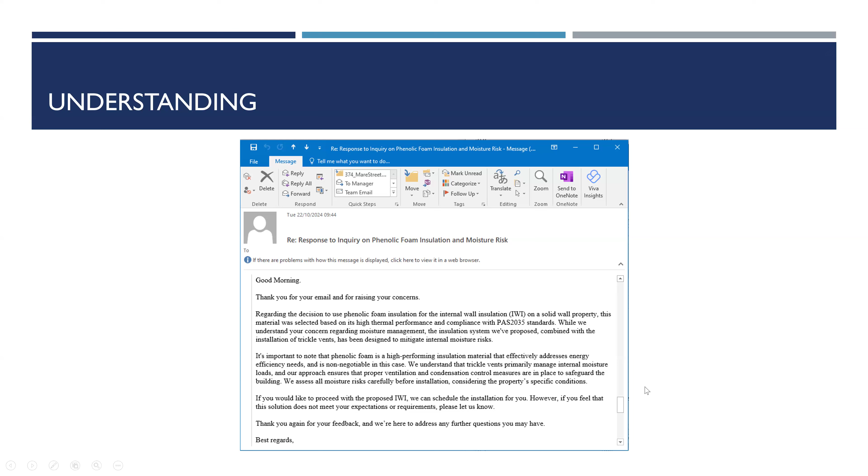Where they say we understand that trickle vents primarily manage internal moisture loads, they should really be saying we don't understand ventilation. Our approach ensures that proper ventilation and condensation control measures are in place. We assess all moisture risks carefully, but if they do, they're clearly using the wrong metrics, the wrong assessment method. So there are plenty of risks around, unfortunately, for lots of different building types, not just the posh stuff.

Okay, I've got a training question, maybe for John, if that's okay. It's a bit of a hard one to answer, but it was: how long will it take for architects and the workforce to upskill to what's needed? Sorry, that's a horrible question, but yeah.

Gosh, I don't think there's ever going to be an end to it. Just as I've discovered over the last 3 years of being involved in retrofit, things are constantly changing, our understanding of how to do things in certain types of buildings, etc., and as new products come online. But I would hope certainly in the next 3 years that we would start to see something more formal in terms of training for architects, surveyors, and everyone else involved in that supply chain in terms of retrofit, and become more formalized so that we separate that out.

I've seen there's a lot of talk about accountability, and how accountable architects are and everybody else involved in that supply chain. I think that's a good thing, and hopefully that will drive further training. Probably a fudge answer, but yeah, there's so much we don't know even now. So watch this space, I guess we'll just keep driving on.